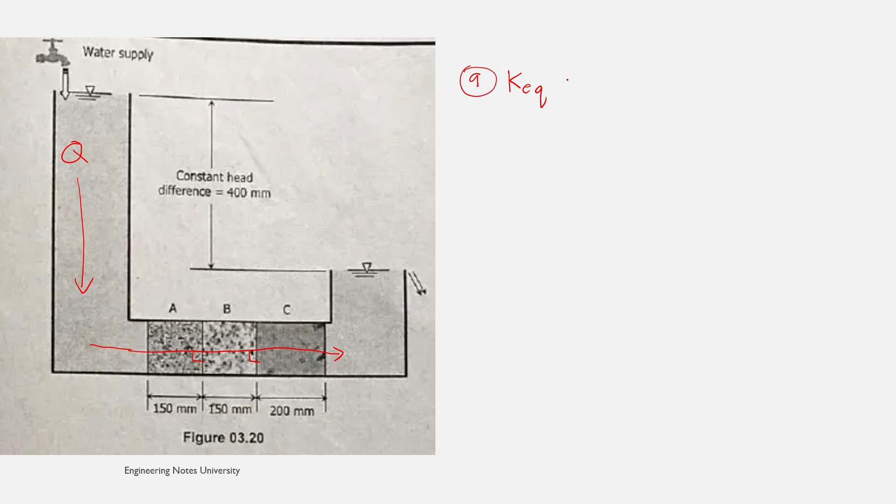So, meaning, pag across or perpendicular dito sa mga soil layer natin, ang tawag doon is normal flow. So yung K na gagamitin natin dito, equivalent hydraulic conductivity, is yung normal flow. So again, kapag across or perpendicular doon sa mga soil layer natin, that is the normal flow. Magkakaroon tayo ng 90 degrees doon. Yun yung flow ng water dito sa mga soil layer natin.

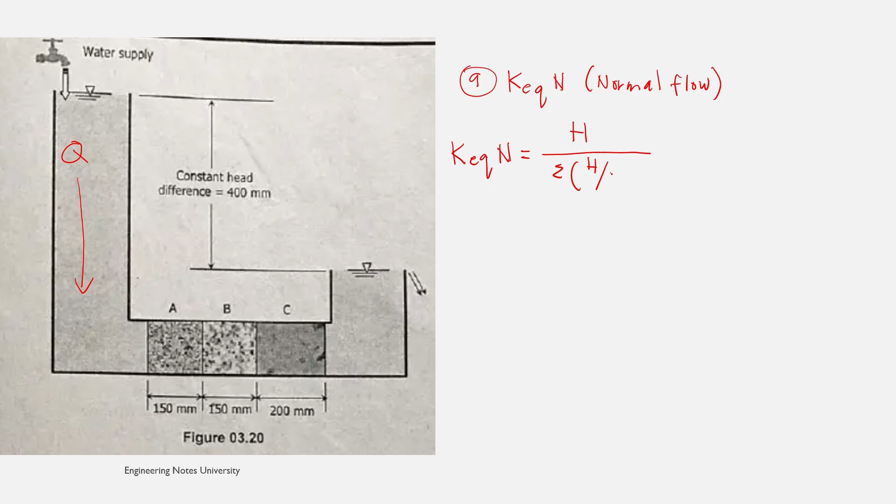So, dito yung formula natin, K equivalent, N na lang natin, N for normal. Yung formula natin dito is yung total ng distance or the height, divided by summation ng height divided by yung hydraulic conductivities ng bawat soil layer. Pero dito, ang binigay sa mga soil layer natin is hindi height, ang binigay is yung mga length.

So L1, L2, and then ito yung L3, and then ito yung total length ng mga soil layer natin. So papalitan natin siya. Itong H magiging LA, LB, plus LC. So LA plus LB plus LC, divided by LA over KA plus LB over KB plus LC over KC.

So now, pwede na nating isalpak. Ito yung L natin, 150. Pwede nyo namang i-direct na. Magiging L summation: 150 plus 150 plus 200. So yung L natin dito is 500. 150 plus 150 is 300, plus 200. So 500 mm.